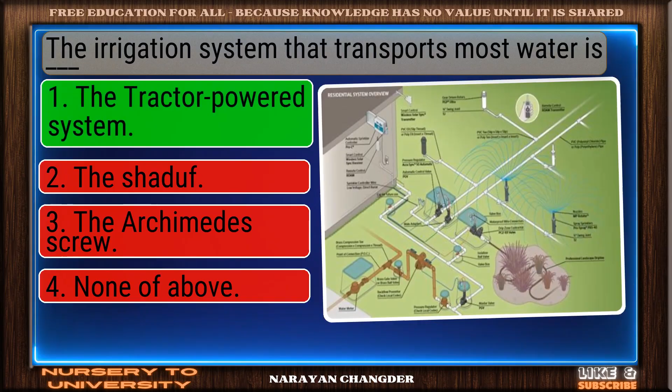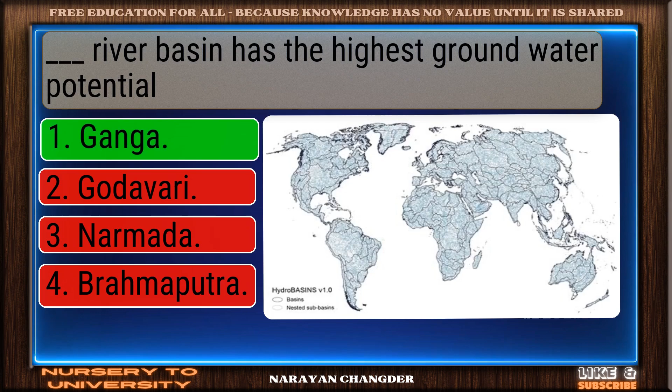Dash River Basin has the highest groundwater potential. Exactly, Ganga makes sense and it is the right choice.

Difference between gross storage and dead storage dash. Perfect, live storage is the correct choice.

What has made irrigation possible in high-level areas? On track, river lift system is the correct answer.

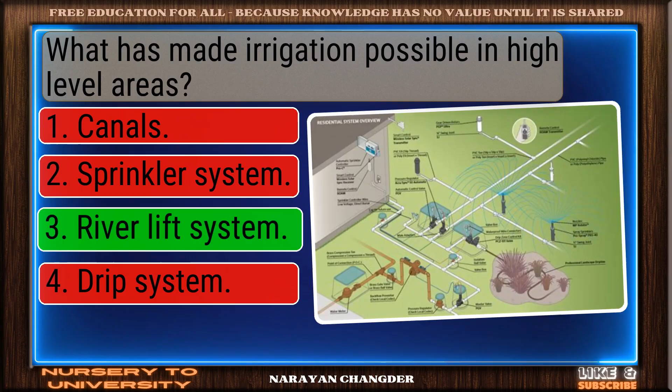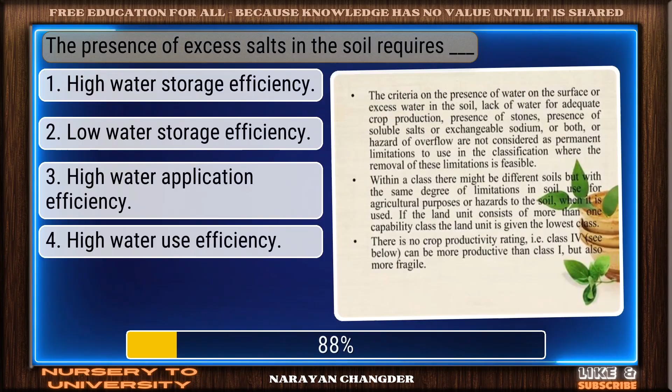The presence of excess salts in the soil requires dash. Bravo, high water storage efficiency is the answer.

Dash scoring escapes have become obsolete because of. You chose silt ejectors, and it is correct.

A narrow V-shaped valley indicates the choice of dash. Nicely done, arch dam is a solid answer.

In which type of weir does energy dissipation take place? You got it, your choice parabolic weir is right.

The movement of water through the soil is called dash. Good job, your answer percolation works well here.

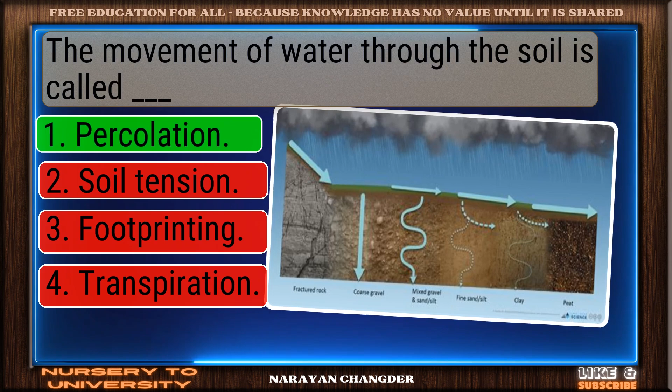Which type of irrigation avoids the wastage of water? Right choice, drip irrigation is the best answer.

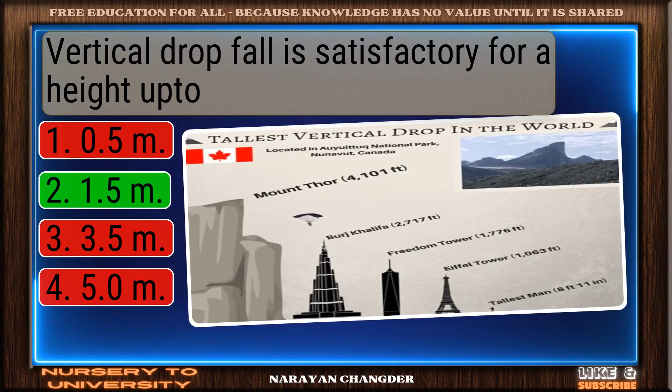Vertical drop fall is satisfactory for a height up to. Great job, 1.5 m is the accurate answer.

What is the difference between a weir and a barrage? Smart move, no solid obstruction is an accurate answer.

Which of the following forces do not act on the dam? Well picked, creep pressure is the correct answer.

The field water efficiency of trickle irrigation is. Great thinking, 80 to 90 percent is the right choice.

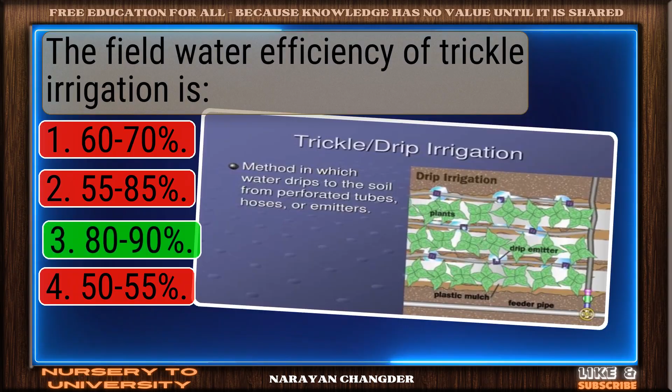A dash dam is generally called a weir or barrage. Clear logic, your choice diversion dam is sound and 100% true.

Dash is a man-made waterway that allows water to flow. Strong choice, canal is the right answer.

Which of the following can be used as a meterfall? Nice work, you chose vertical drop fall, and it is correct.

Which efficiency is also called on-farm efficiency? Excellent choice, water application efficiency is the right answer.

Peak use is the maximum amount of water needed for. Valid point, one day is true.

Plants are watered in individual pots through dash. Right again, tube watering system is a valid answer.

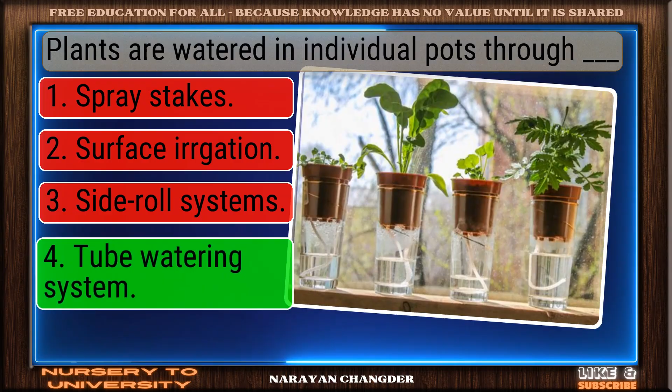Dash type of canal is most useful in hilly areas. You're right, contour is the correct answer.

Which of the following is known as a debris dam? Nice selection, detention dam is the correct and valid answer.

Watering of plants through artificial means dash. Correct, irrigation is the right answer.

Dimension of coefficient of transmissibility are. Well done, M0L2T-1 is the right choice.

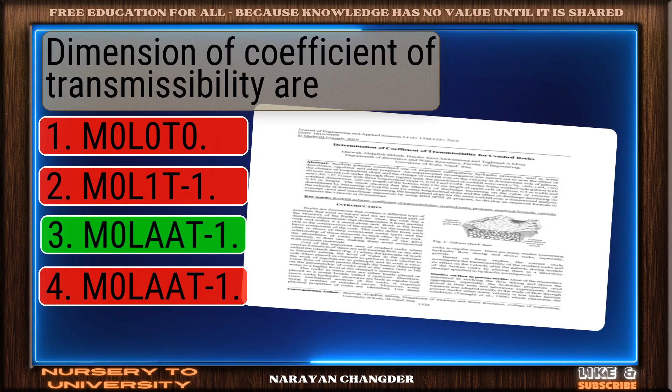Trap efficiency of a reservoir is a function of. Sharp thinking, capacity inflow ratio is the right choice.

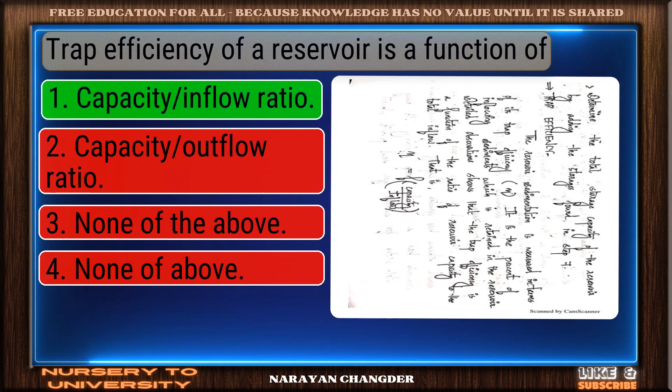Diversion headwork is suitable for dash rivers. Well reasoned, perennial rivers is the correct choice.

The major resisting force in a gravity dam is. Solid response, self-weight pressure is a valid choice.

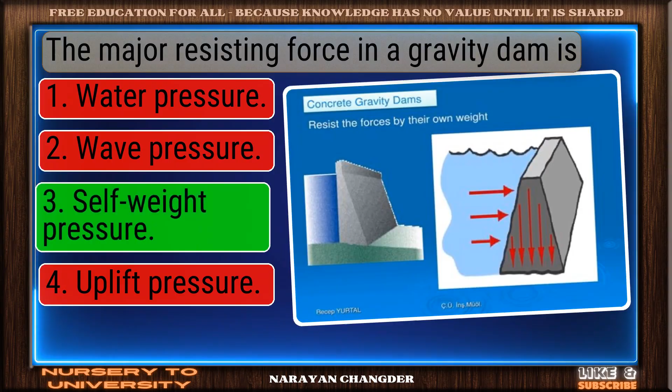Hydrograph is the graphical representation of. Correct response, runoff and time is the most accurate answer.

What is the other name for flood irrigation? Well reasoned, uncontrolled irrigation is the correct choice.

Which type of fall is not adopted in India? Well picked, Montague type fall is the correct answer.

A canal which is aligned at right angles to. Correct response, side slope canal is the most accurate answer.

Dash CD works carry drainage under the canal. Well done, aqueduct and siphon aqueduct is the right choice.

Famous Roosevelt Dam in USA is of the type. You're right, solid masonry gravity dam is the correct answer.

Practically the best hydraulic channel is. Right again, semicircular is a valid answer.

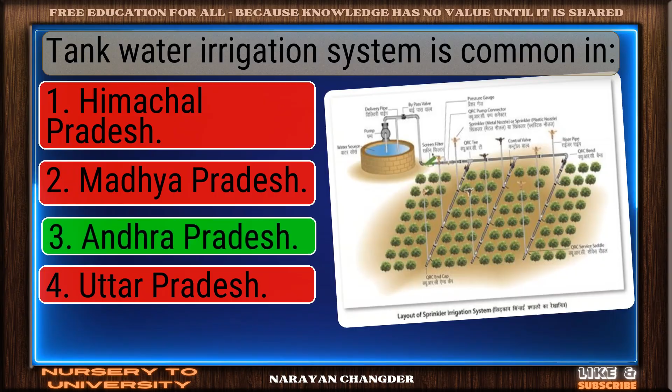Tank water irrigation system is common in. Sharp thinking, Andhra Pradesh is the right choice.

Optimum depth of kor watering for rice is. Great job, 190 mm L is the accurate answer.

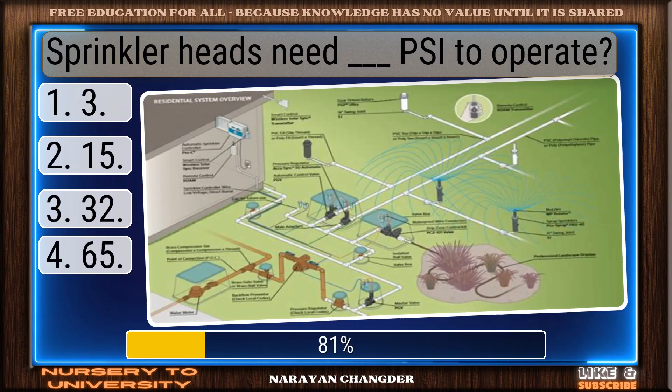Sprinkler heads need dash psi to operate. On track, 3 is the correct answer.

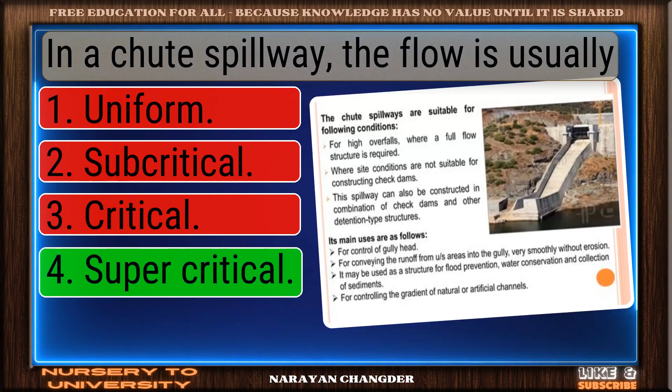In a chute spillway, the flow is usually. Strong choice, supercritical is the right answer.

Corrugation is a type of dash irrigation. Nice selection, furrow is the correct and valid answer.

Dash is a form of overhead irrigation. Correct, sprinkler is the right answer.

Sprinkler irrigation is used in soils. Perfect, sandy soils is the correct choice.

Droughts occur due to the scarcity of. Bravo, irregular distribution of rain is the answer.

Cheap and popular irrigation in India. Good job, your answer works well here.

The sensitivity of a rigid module is. You got it, your choice 0 is right.

Superpassage is the reverse of dash. Excellent choice, aqueduct is the right answer.

Sub-irrigation is used in areas with. Smart move, high water table is an accurate answer.

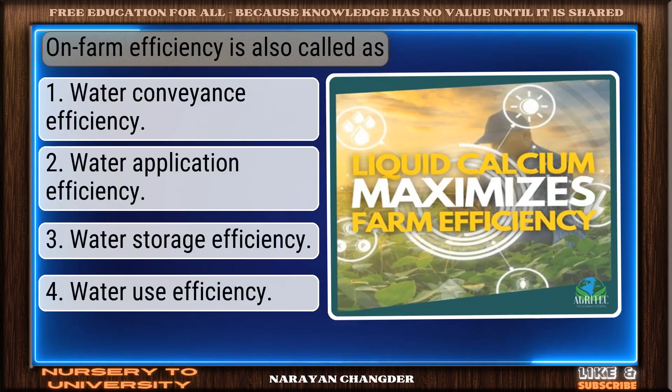On-farm efficiency is also called as. Good thinking, water application efficiency is the right answer.

Dash contact on the downstream side. Right choice, toe is the best answer.

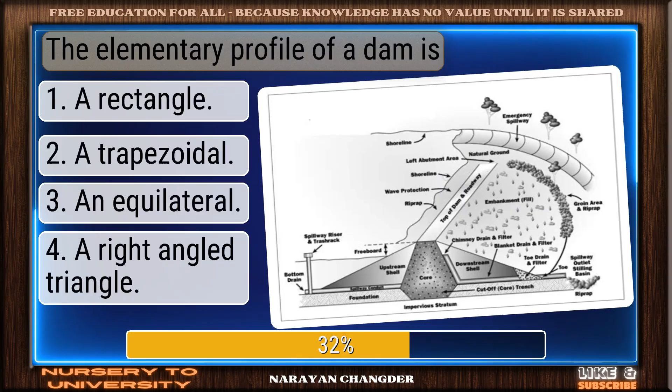The elementary profile of a dam is. Nicely done, a right-angled triangle is a solid answer.

Water tank is a container used for. Excellent, storing water is a brilliant choice.

Unit of runoff in MKS system is. Valid point, cubic meter per sec is true.

Multiple arch dam is an example. You chose buttress dams, and it is correct.

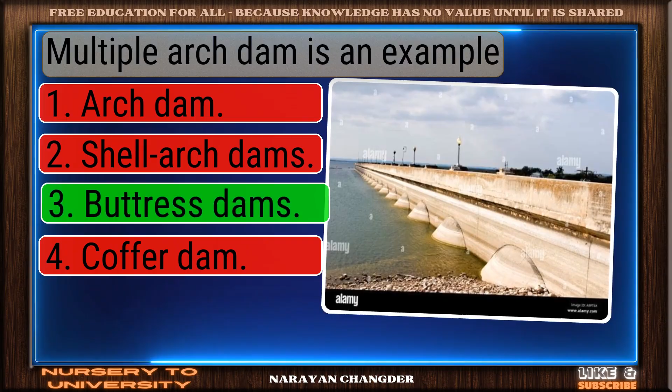Applying water under pressure. Smart pick, sprinkler is the correct choice.

Garrett's diagrams are based on. Nice work, you chose Kennedy's theory, and it is correct.

Tanks use up large areas of. Clear logic, your choice land is sound and 100% true.

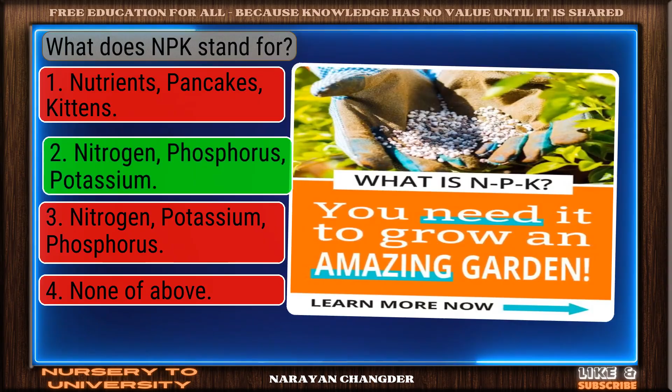What does NPK stand for? Great thinking, nitrogen, phosphorus, potassium is the right choice.

FTL stands for dash. Solid response, full tank level is a valid choice.

Guide bank? Exactly, Bell's bund makes sense, and it is the right choice.